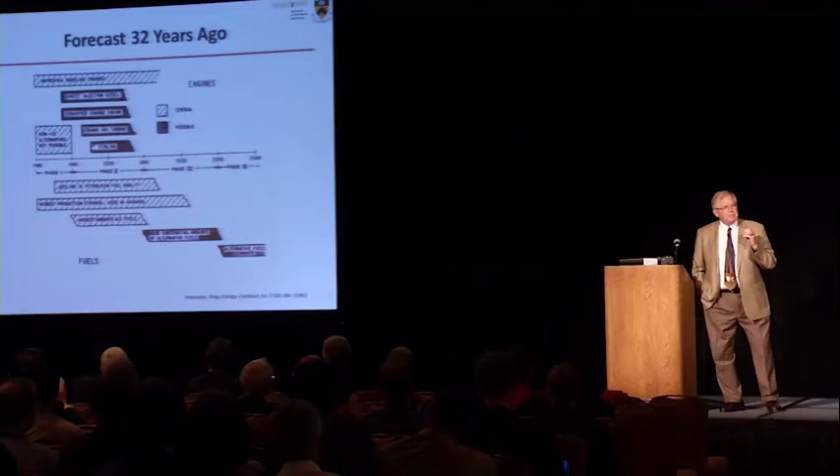Let me start today by showing you something John Heywood put together in 1981 about the energy field, engines and fuels, which is what I want to speak about today. I'm not going to talk as much about kinetics as many in this audience would think I would. I want to talk about real fuels and their interface with engines -- all types of engines and all types of fuels.

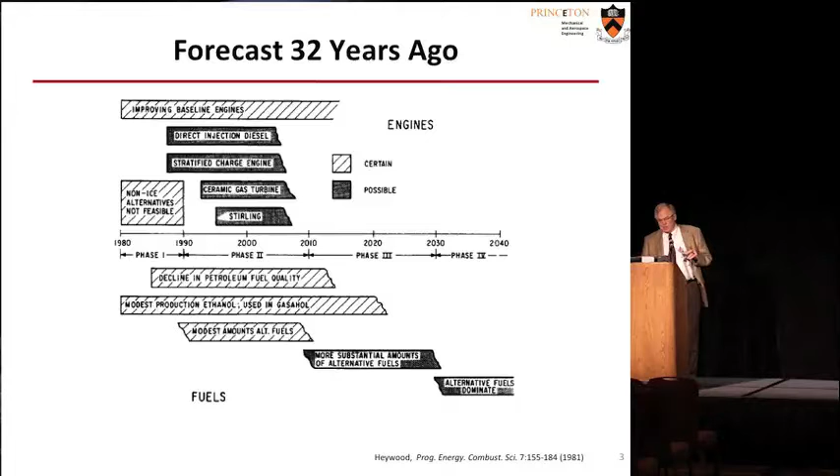I think John was quite insightful 32 years ago to build this slide. You'll notice we should be well into alternative fuels by this time because petroleum should be disappearing by now. This isn't as good as it might seem, from the point of view that there are some things missing -- this is how much the evolution of engines has changed in 30 years. HCCI and RCCI engines were not really being discussed 30 years ago, and they're now extremely prominent for their possibilities of major changes in thermal efficiency in engines and major changes in the way we deal with pollutant emissions from engines.

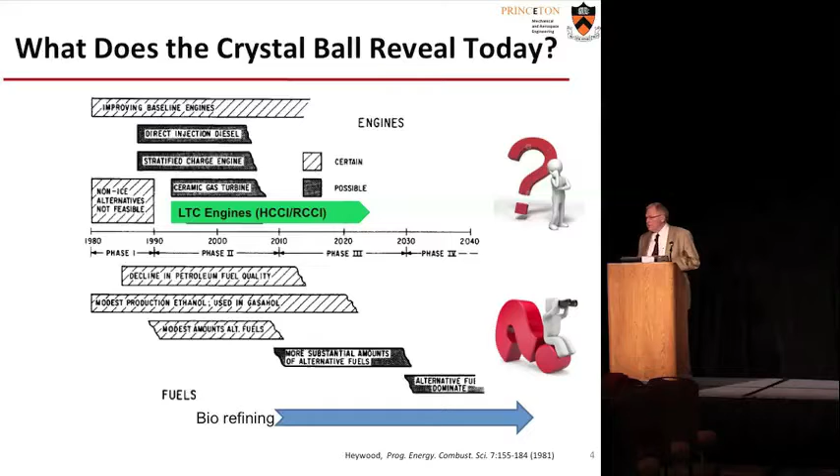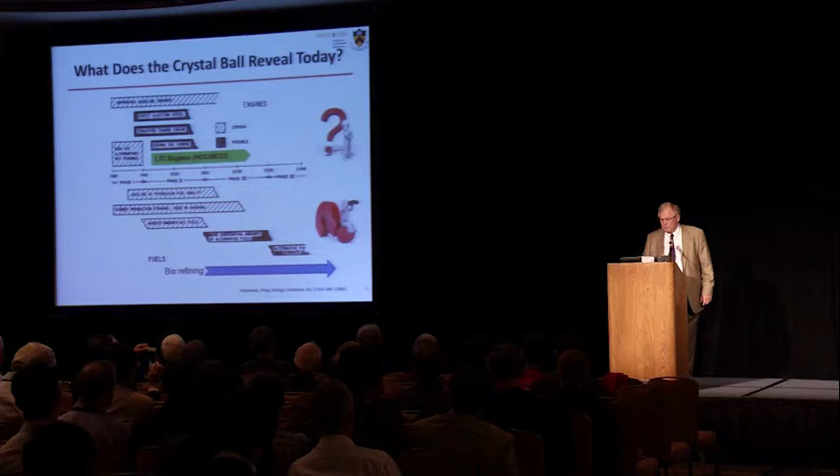The second aspect is biorefining. We've been learning much about how to make things in very efficient ways from plant life. We in this audience have been very interested in fuels, but the real profitable aspects are not fuels -- they're chemicals, biochemicals, and pharmaceuticals. On that list, fuels is not at the top. Making fuels economic is going to be a real challenge. So the question marks are real for our future -- whatever we say now probably is not going to be what really happens. We're going to evolve new science and new technologies. The drivers 32 years ago are the ones I've listed here at the top.

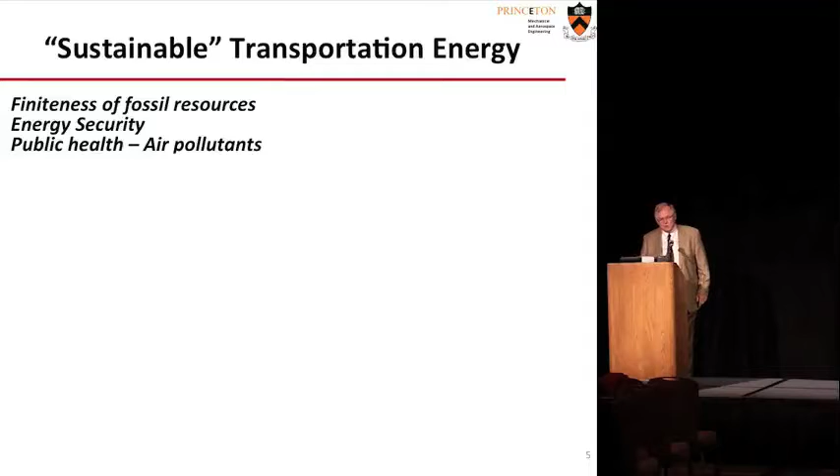I can remember very well in 1981 the issue about energy security. It was exactly the same here in the States, but there's something very new: carbon particulate emissions and climate change. We were talking about global cooling in 1976, not global warming. It was a very different time.

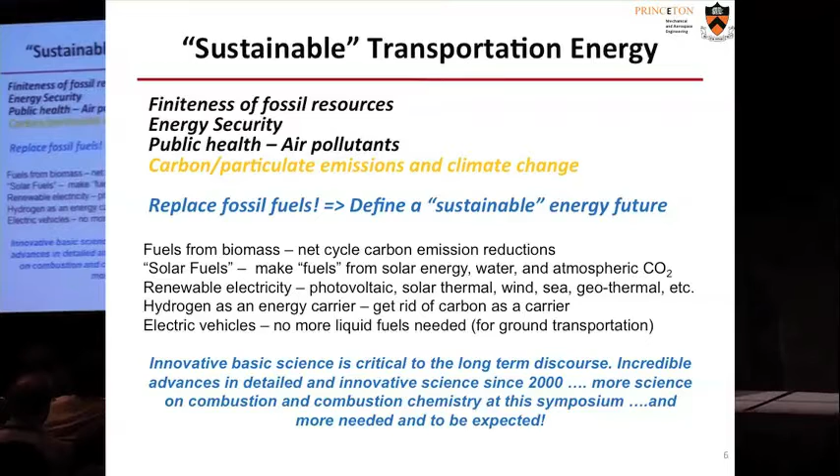Today the paradigm we hear is replace fossil fuels, get rid of fossil fuels, go to a sustainable future in energy, don't use carbon as a hydrogen and energy carrier. We'll make fuels from biomass. We'll make solar fuels from solar energy, water, and atmospheric CO2. We'll use renewable energy from wind, solar, sea, and geothermal, and replace having to burn fossil fuels. We'll use hydrogen as a carrier. We don't need carbon. We'll make electric vehicles.

There's been much innovative science here this week, very new. Our models are evolving, and our understandings in these areas are evolving at a pace probably not seen before because of the coupling of computations and experiments. Now I'm going to emphasize experiments today because I think experiments are the proof. Models are a way of interpreting experiments, and unfortunately models are still evolving. It's going to take some time, I think years, before we have all the details we really wish.

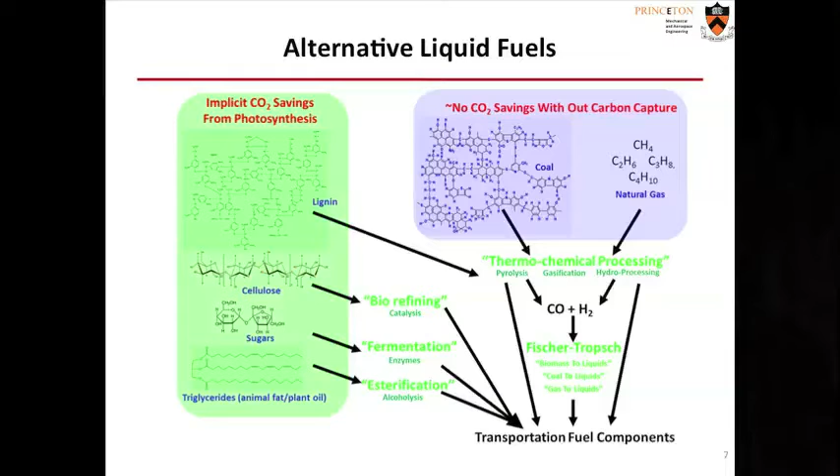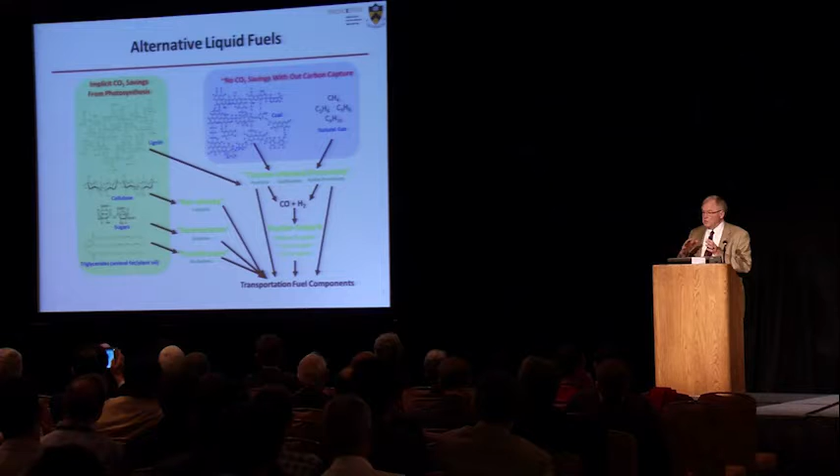And we have to do something in the interim. Those science advances are expected, especially for the alternative fuels field. This is only a very quick representation of what's emerged in less than 10 years through different methodologies of producing various fuels, mainly either thermal processing or bioprocessing, and not so much by actually combining them to optimize these processes. But we need to think about how to integrate those things.

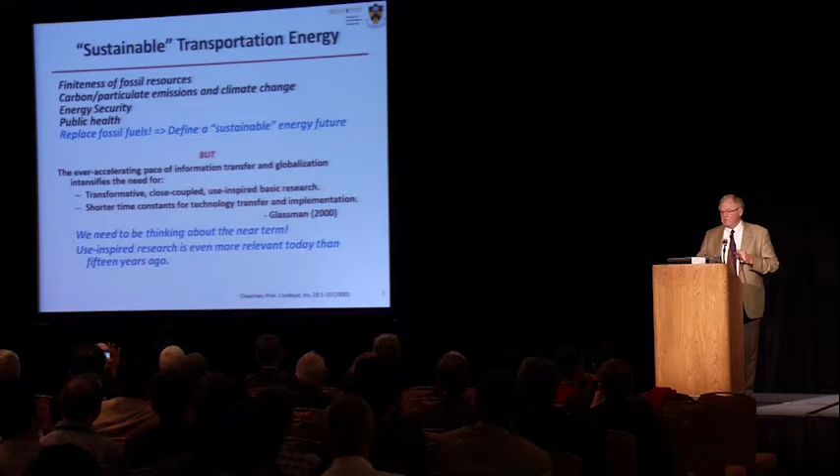I want to remind you all of a message my mentor delivered in 2000, which was transformative: close-coupled, use-inspired basic research is even more important as technology transfer and communication issues evolve. It's more important today than it was 15 years ago, in my opinion. But we have to look at today's stage.

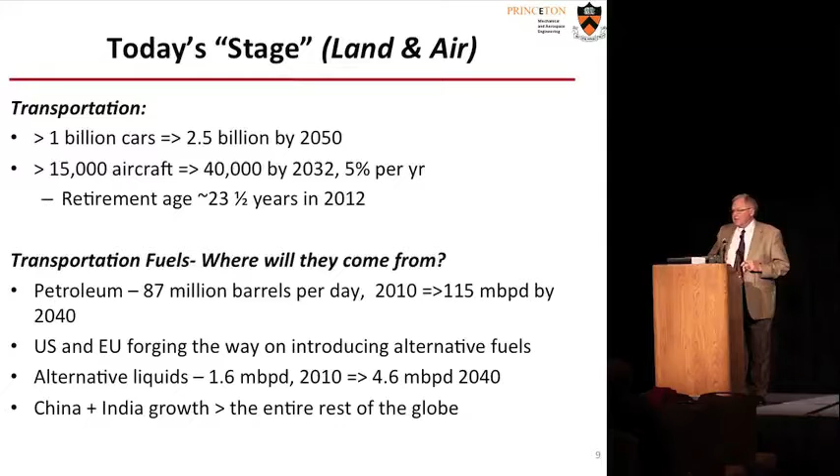Kalghatgi reminded us yesterday that there's going to be 2.5 billion vehicles on the road by 2050. There are 15,000 aircraft in the air today globally, expected to reach 40,000 by 2032. The retirement age of aircraft today is 23.5 years, and it's been between 25 and 27 years for the last three decades. Think about trying to replace that inertia in vehicles with new technology, with controlled emissions.

When we send our cars here that have some control elsewhere in the world, they remain in the pool for another 30 years. Our pool will change, their pool will not.

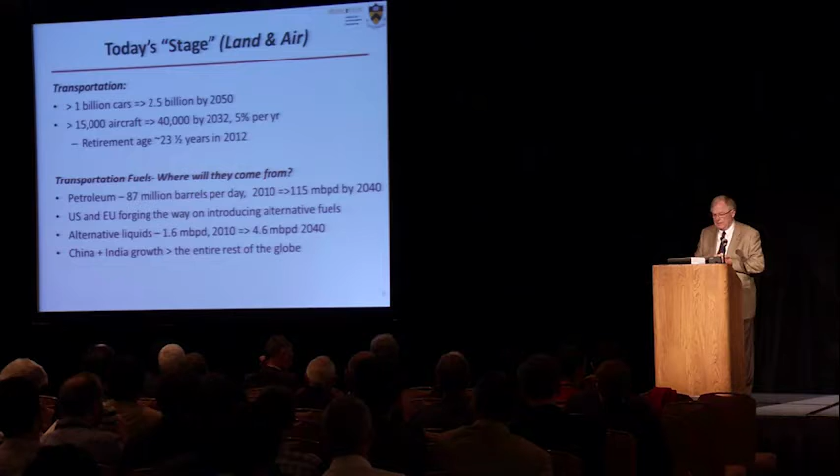Petroleum is at 87 million barrels a day today, going to 115 million barrels a day by 2040. The US and EU are both forging ahead with very aggressive programs for alternative fuels. The rest of the world, I doubt seriously. My opinion is they can't keep up with us if we do this.

And it's reminiscent of the issue I mentioned next, which is the alternative liquids issue: in 2040 that's only supposed to be perhaps maybe 4.6 million barrels a day, and a very large share of that not coming from biomass, but from coal, shale, and other fossil petroleum resources. China and India's growth in energy is going to outpace the rest of the entire world over this period.

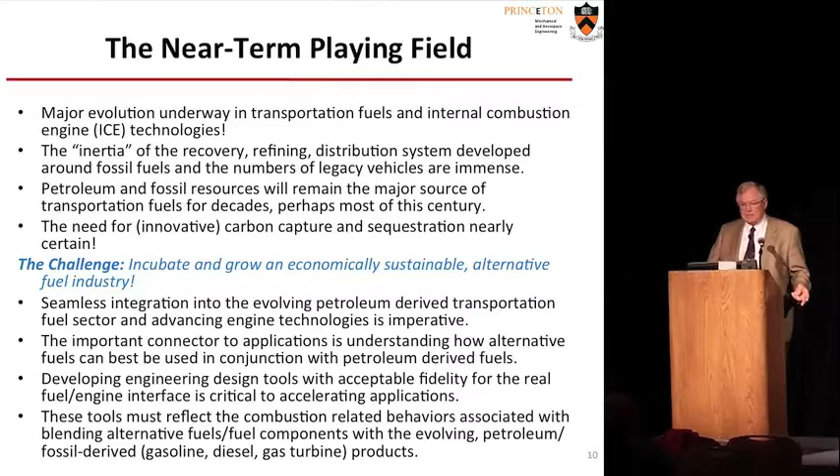You cannot ask people to make the transfer to non-fossil fuels when people's living standards and their ability to eat are affected. This is no different than it's been for the last century.

So major evolutions are going to be required, but we have to be careful about the inertia of the energy system and the transportation system. We need to integrate these changes now, or we cannot build these things in an economic manner that they will be self-sustaining. We can't start an industry of alternative fuels that's going to affect 2100 if we don't integrate it now.

And that means those fuels are not going to be things we burn in pure state. In my opinion, pure-state discussions about oxygenated fuels are very important to science, but they're not going to solve the application side, because all of those are going to require that we blend those materials with petroleum-derived materials if we're going to incubate this new industry well. So that seamless integration is important.

The seamless integration doesn't just extend to the use side, but to the processing and distribution side as well. Do you think we can add new pumps at every station for new fuels, or change our distribution system immensely? We need to consider how to do this in as seamless a way as possible.

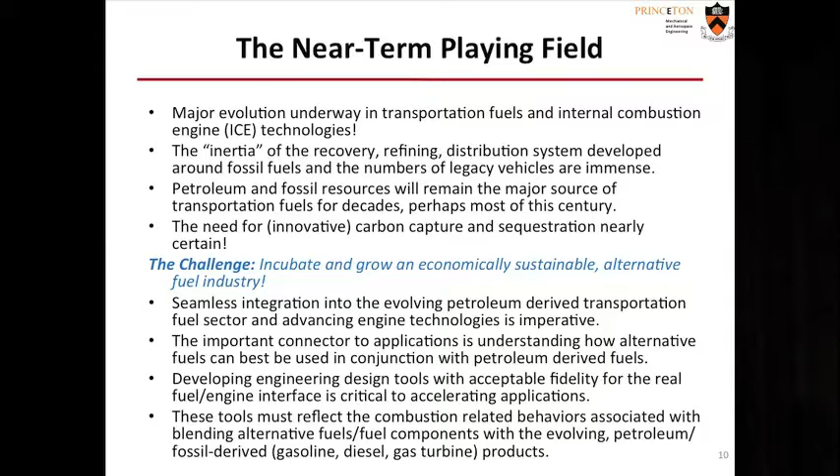The important issue here too is that we need engineering tools to do this. They can't be DNS, they can't be something that takes 100 or 200 hours on computers. I need to do something parametrically. I need to change a parameter. I need to see what the optimization of those issues are. That means I must simplify each one of the submodels involved in those engineering design tools.

I have yet to see someone tell me which ones I can achieve the least accuracy in and still have good engineering tools, and each one is going to be different. Many of us in this audience are interested in chemistry, and I'll remind us all at the end: how accurate do we need to be for engineering tools? I'm not sure. It's a question.

So let me say first, these tools, we want to know how to represent real fuels and the addition of other compounds to it.

I wanted to show you a real fuel. This is a GC by GC analysis of a real diesel fuel, recently published. Each one of those little circles is an indication of the component mass in that exposure. You'll notice the carbon number scale up at the top and the type of fuel on the right. We want to be able to represent that in engineering design tools. You can see how complicated this is—not only in terms of the amounts, but the distributions. There's thousands of compounds here, and we need to represent those in engineering tools.

So how do we do this? Well, this is the commercial way of doing it as far as the industry is concerned, and it's going to stay. Why is that? Because when we make fuels, we have to have a way of classifying them and standardizing them so that they are fit for purpose in the particular design system that we wish to use them. To do that, how are we going to specify that?

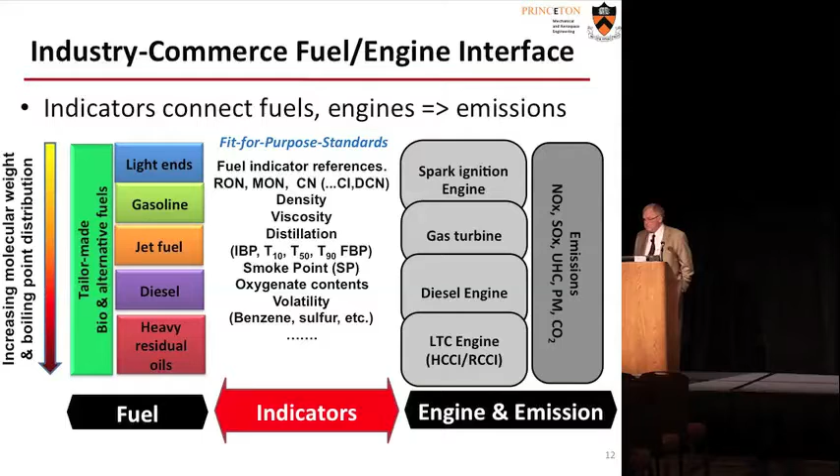When we really need to do that, we specify it through what are called indicators—fuel indicator references is what I've termed them. Research octane number, motor octane number, cetane, several types of cetane, cetane index, derived cetane number. Are they all the same? No, they're not. Cetane index is something that you and me should not be using because it doesn't apply to alternative fuels. It doesn't apply. It's built on correlations from petroleum.

Distillation curve, viscosity, density, initial boiling point, T10, T50, T90—those are recovery temperatures for distillation. I've recovered 50% of the mass at T50. Smoke point—odd test, right? Odd test. A wick test for smoke point. A height of a diffusion flame that soots. It's a standard for gas turbine fuels.

Oxygenate contents—we never define what the species distribution is in these fuels. We only define limits in reality. And that's the connector between the left side and the right side.

And I purposefully added another engine class here called LTC, low temperature combustion. I'm going to talk specifically about HCCI and RCCI. Now, yesterday, how many of you feel comfortable about engines? How many of you feel you know how a MON and RON is interpreted? I'm going to go very quickly here because I don't have a lot of time for this, but I want to make sure we're all on the same page on these issues. It's my instructional heritage from teaching.

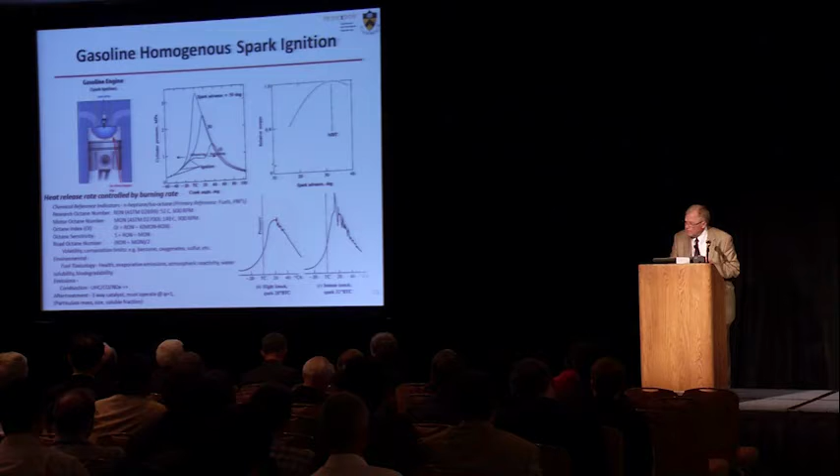And how these things just don't seem to work for some other applications because of the differences in RPM and other issues. And I want to talk some more about that. Diesels.

Multi-phase combustion. Here I was pre-mixed because I put fuel in the chamber very early during the compression stroke, perhaps with port injection. Here I'm injecting directly into the engine, and I now have a diffusion flame, and the heat release is not controlled by the burning rate progress across the chamber as it was in HCCI or in spark ignition. It's controlled by the mixing rate in the system.

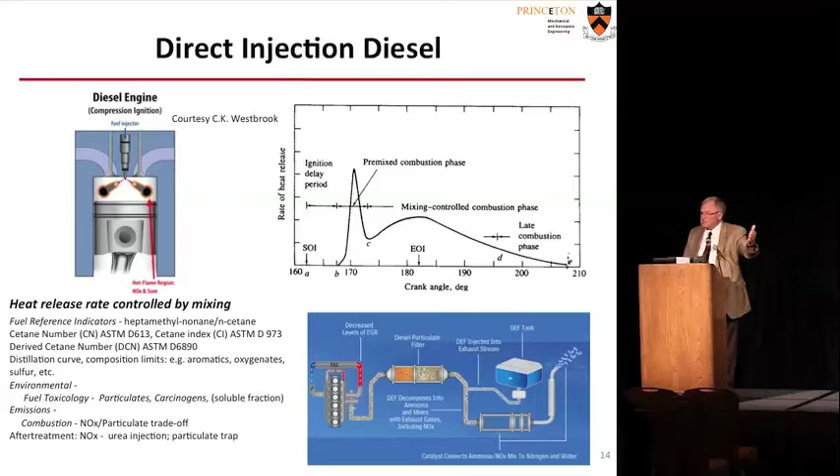It's controlled by the mixing rate, and I have two stages to it. When I start injection at SOI, right here, this is top dead center for the piston, I have some time for things to mix, so I have a pre-mixed burn of stratified material when it first ignites, followed by a mixing limited one. These can vary depending on the design, and we have some very modern injectors today that can pulse several times to change that whole profile.

But here's the complication. Diffusion flame, very hot, NOx. Not hot enough, particulates, because they didn't burn out - it's a NOx particulate trade-off. I've got to have all of this after-treatment to control emissions. It's as expensive as the engine. If I can get rid of it, it's extremely important.

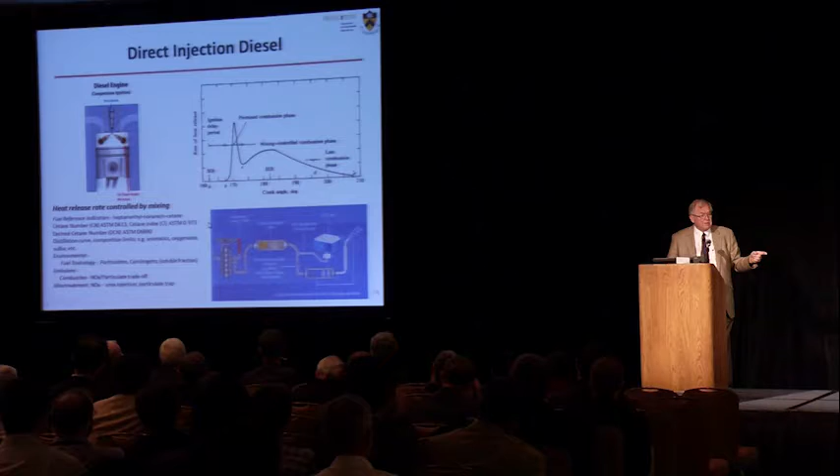Homogeneous charge compression ignition, LTC, a very specific kind. I'm going to homogeneously charge the engine with a mixture. There's no flame propagation in this engine. The burning rate is controlled completely by the chemical kinetics.

This is the theory. The reality is it's not. If I stratify the charge, I get some other behaviors that are important. But I want to show you some things that are very important to the issue of OI, MON, and RON. When I look at this engine under a condition where it's controlled auto-ignition for a homogeneous charge, I see what you see over here on the right as a function of crank angle.

Crank angle here, if I can read it against the light, is specified where 0 is top dead center. What they've done in this experiment is adjust systems such that this peak heat release is in the right place to get performance. They do that by finding the right crank angle, CA50, where 50% of the heat release has occurred. That's a control parameter for these kinds of engines.

And I want to show you what happens. I've got some low temperature heat release out here, and I've got the major heat release here. These are for primary reference fuel mixtures. Remember...

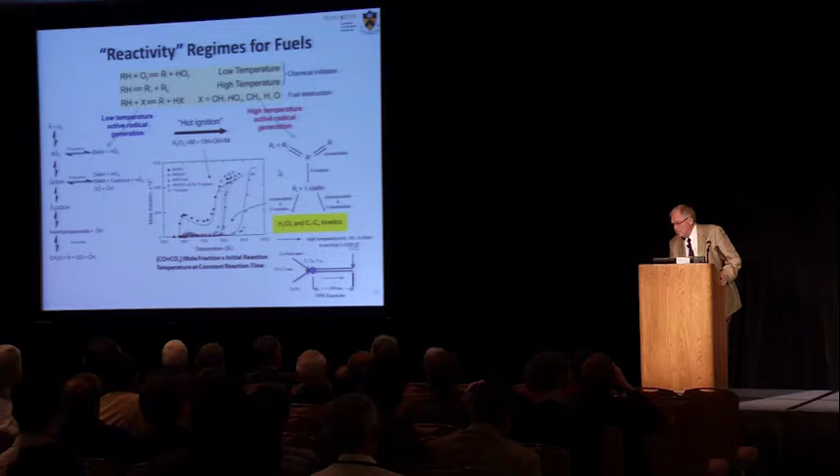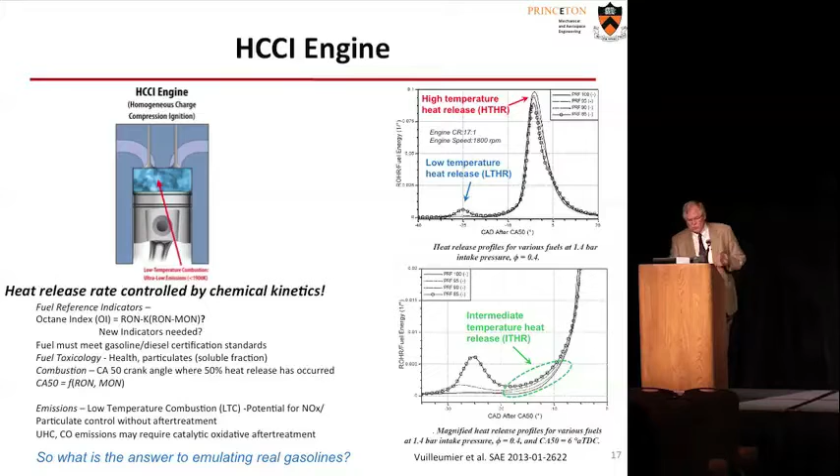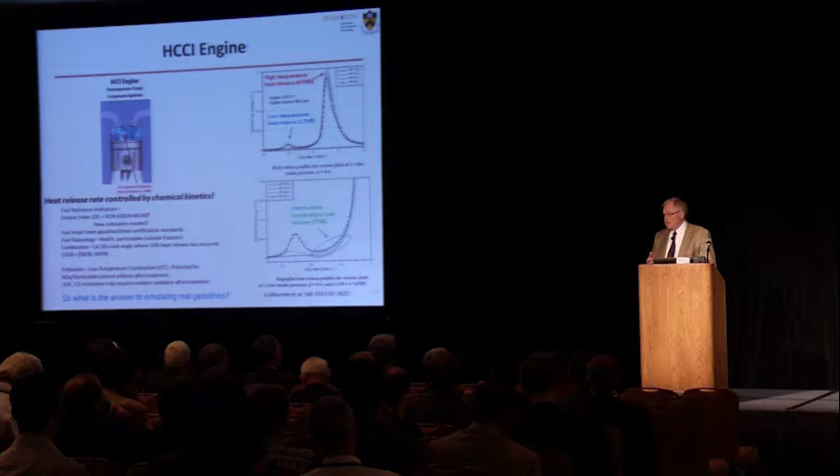So what is the answer to emulating real gasolines? What several have found is that if I try to emulate a real gasoline by using a PRF mixture that matches the MON and RON, it doesn't work. Why doesn't it work? It doesn't work because those aren't the only parameters that are important to emulating real gasoline.

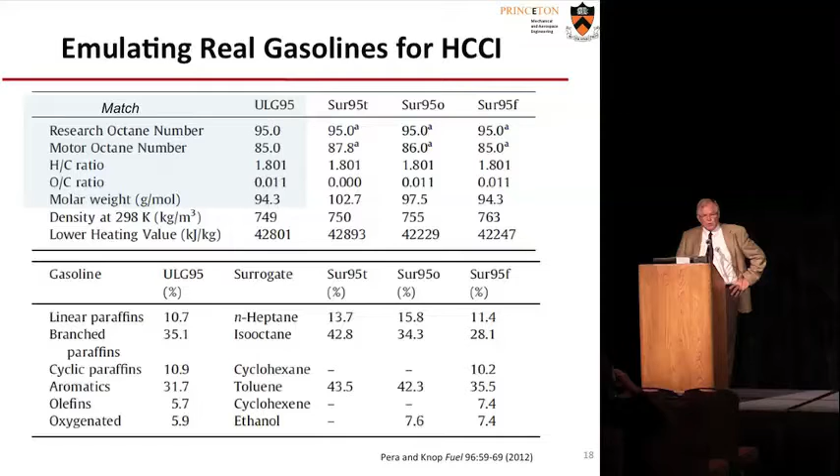This paper by Pera and Knop demonstrates something that we started working on in 2000, and you'll find the early publications around 2003, 2004 about matching what we call property targets for gasoline. They chose the following property targets: RON, MON, HC ratio, and if it had an oxygenate in it, OC ratio. They said, I've got to match those things. You can't do that with PRF.

The HC ratio for PRF near 90 is 2.25, and the gasoline is 1.8. That means the energy density of those materials are entirely different. That means that at an air-fuel interface, I don't have the right volumetric stoichiometry with air for phi equals 1, which is the way I need to operate an engine to control with three-way catalysts.

So let's try to match those, and we'll do it by adding toluene to N-heptane and isooctane, which is what they did. Here's the gasoline that's used for standards in Europe, and here is a match of that gasoline in terms of RON, MON, HC ratio—I left out the oxygenate, I'm not going to put an oxygenate in it. And here is the density and the lower heating value that were obtained by doing that.

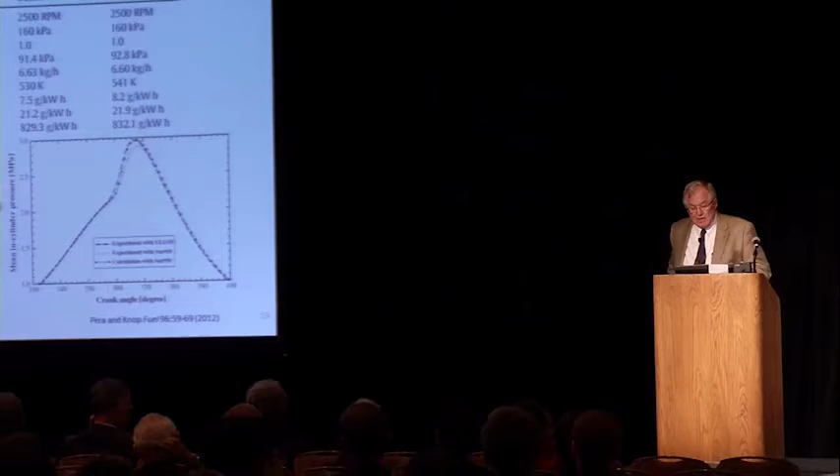And when I did that, I got exactly the performance of the real gasoline in a compression auto-ignition engine. And not only did I get that, I got the same emissions.

So we can match gasolines, but we can't match gasolines with just OI. There are more combustion property targets that are needed to match and study real gasolines. And you cannot study real gasolines in real engines using PRFs. How many of us have been using PRFs all of this time to try to understand real gasoline? You can't do that. And you certainly can't do it in HCCI because I can't match the LTHR, the ITHR, and the HTHR. I said some of my statements are provocative, and I meant it.

And I hope we have a discourse about these things. I think it's very important.

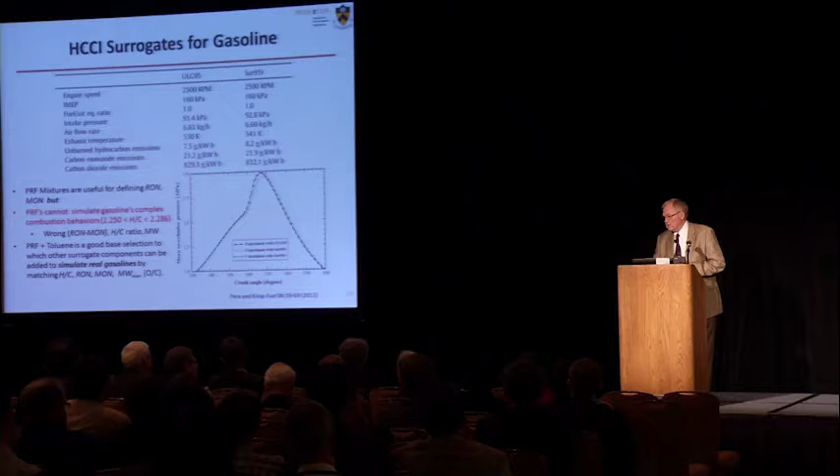So is this idea really something I can pursue elsewhere? Suppose I try and I inject two fuels now, one that has a high octane, one that has a low octane, and I do this in real time so I can vary the octane character in the engine. Reactivity controlled compression ignition. Two fuels on board.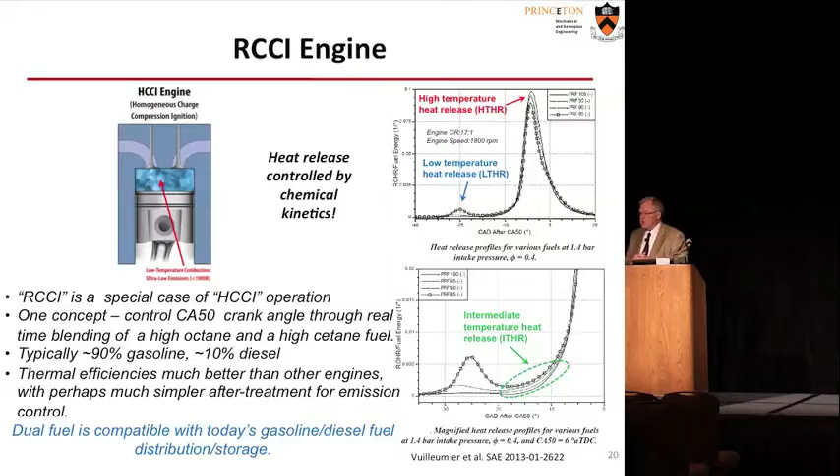Oh my goodness, two fuels on board—2 tanks in every diesel on the market today to control NOx. Did you know that? Urea is injected after the engine. That's a second tank to control NOx in vehicles. So 2-tank technology is there.

How about injectors? Injectors are there, PZTs. Controlled, very multiple pulse. I can stratify the charge in this HCCI by direct injection and by aspiration of one fuel and injection of another. I can do it several ways. And this is what Dr. Reitz has been studying and Sandia has been studying.

The thermal efficiencies of these engines have been demonstrated in the laboratory to be higher than 60%. That's 35% better than the best diesel. And they have very little after treatment. I don't need to treat for NOx. I don't need to treat for particulates because the temperatures are so low in these engines.

And the increase in thermal efficiency isn't magic. It's that the heat losses to the walls in that engine are so much lower because the combustion temperatures are so much lower. So this is the future for combustion.

It's completely compatible with today's fuel system. I can drive up to a pump and fill it up partly with gasoline, partly with diesel fuel. I can modify diesel and gasoline to meet the advanced diesel engine design and the advanced spark ignition engine design. And I don't care what their octane numbers are because I'm going to build a smart engine.

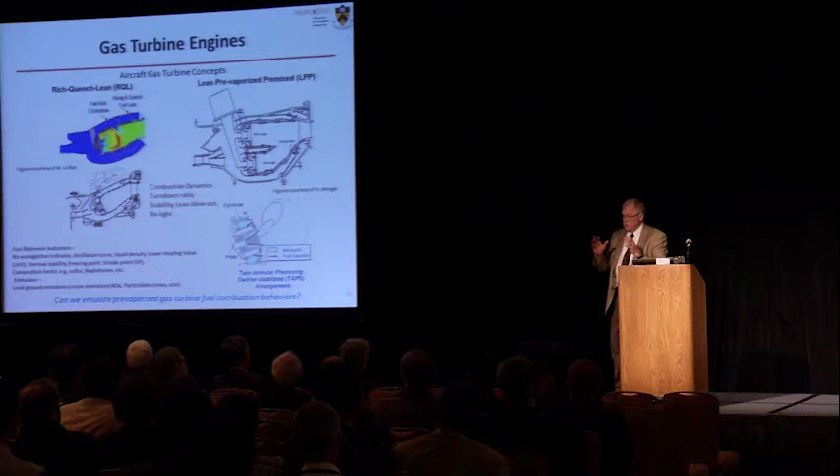So I'm going to add smoke point to this system, but I wanted to show you there are two very different concepts going forth in gas turbines, and it has to do a lot with how I atomize and how I distribute in the beginning. This is not as well characterized right now as diesel injection, and it's a hard part of initialization for modeling gas turbines. Here I'm going to have a rich region, try to keep it rich to keep the temperature down, then I'm going to quench, put things together and go to a lean premix system over here, and you can see they're very different.

So let's talk a little bit about these property targets. DCN - there is no auto-ignition property for gas turbines, so I'm going to make one up. I'm going to use the diesel one. It's not an auto-ignition property, it's a reactivity property - I'm just going to substitute it. It's only a correlative property. I'm not going to use it as a diesel.

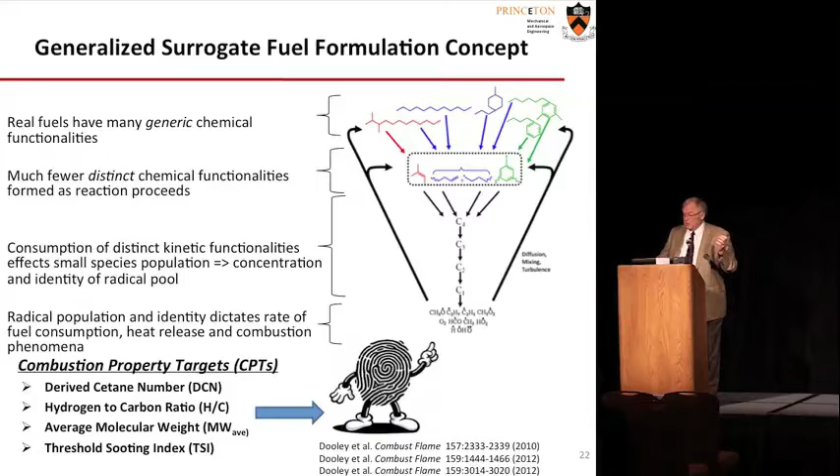I'm going to look at H/C, I'm going to look at molecular weight, which was very important in the last case, and I'm going to add TSI, which is a representation of the smoke point divided by the molecular weight. And I want to emphasize something here - I'm not interested in the real fuels that we started with. I'm interested in the distinct chemical functionalities that they produce.

What are those? If it's an N-alkane, I produce lots of olefinic fragments that are straight chain. If it's an isoalkane, what do I produce? Isoalkanyl groups, C3s, C4s - they have a very different history in terms of their reaction than the straight chain olefins. Aromatics, what's the biggest thing I could possibly see? Benzyl groups - different distinct functionalities. Are there more of them? I believe so. Do we have them all identified? No, this is a work in progress. But they control this region here of C4s to C1s, which generate the pool that attacks the real fuel, and it's this entire cycle that defines the burning rate.

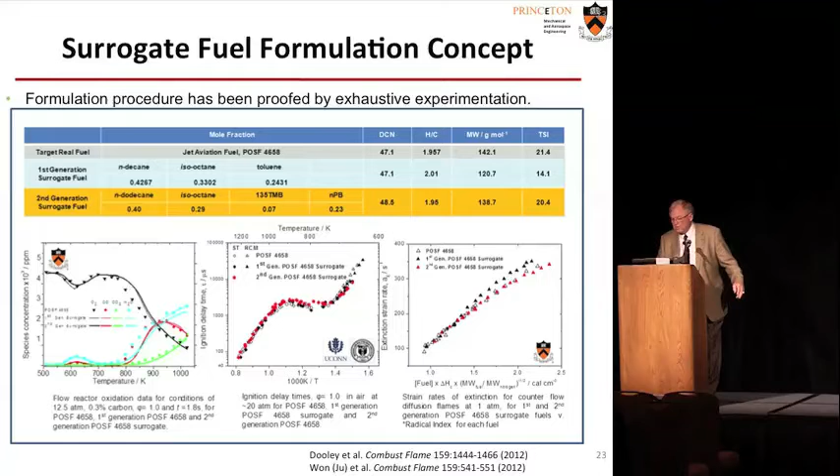Does it work? Here's a comparison of simple surrogates of N-decane, isooctane, and toluene, or N-dodecane, isooctane and two other aromatics. All I did was match the property targets I mentioned with each of those - a first generation, which were only the ternary components, and a second generation. What's different about them? The second generation can actually match the molecular weight. The first generation couldn't. If I look down at the bottom, you can see the reactivity type profiles I showed you for the flow reactor are reproduced for the real Jet A fuel and the surrogate mixtures nearly identically. Not quite in this region, and I'll talk about that. But at the low temperature region, they're identical. At the high temperature region, they're identical.

And here's the proof of that in terms of ignition delays of the real fuel and the two surrogates. The data spread here is as tight as one will ever see in systems. There's rapid compression machine data here, both generated by parts of the MURI team that did this work. And finally, on the right, we looked at strained extinction in diffusion flames, and there we see the molecular weight is a very important issue. We can talk about that later if you wish.

Speciation - I want to mention Ken Brezinsky. This is his work in pulse shock tubes. What he's done is look at the way this speciates as a function of reaction temperature at about the same residence times. You can see that the real fuel and the second generation fuel, totally different in their real species distributions, look identical except for a couple of things, and I'm going to show you what those are. In C2s, they look identical - 4 components and 1,000.

They don't look identical in butenes. Why not? Because we know isooctane produces T-butyl radicals, and we're using that as the isomer here. But it didn't matter at the C2 level.

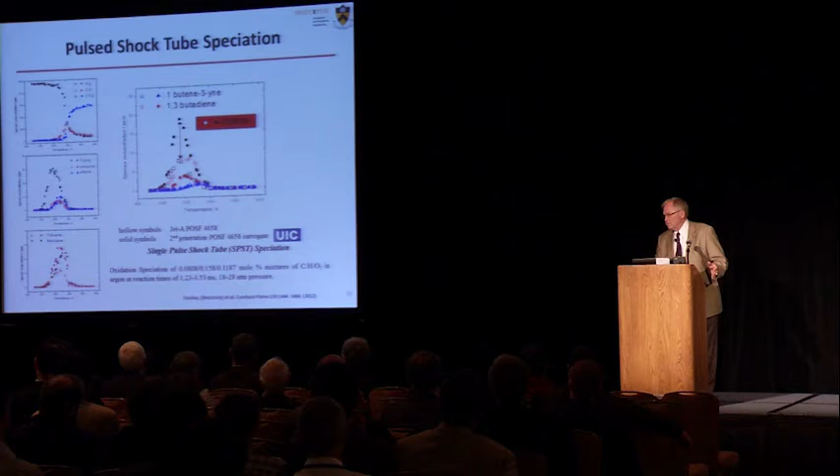So emissions can be done this way, and you have to be careful how detailed you wish to know something. That's the same thing that's true with anyone's detailed model. What does this all come from? Simple functional group analysis of this problem.

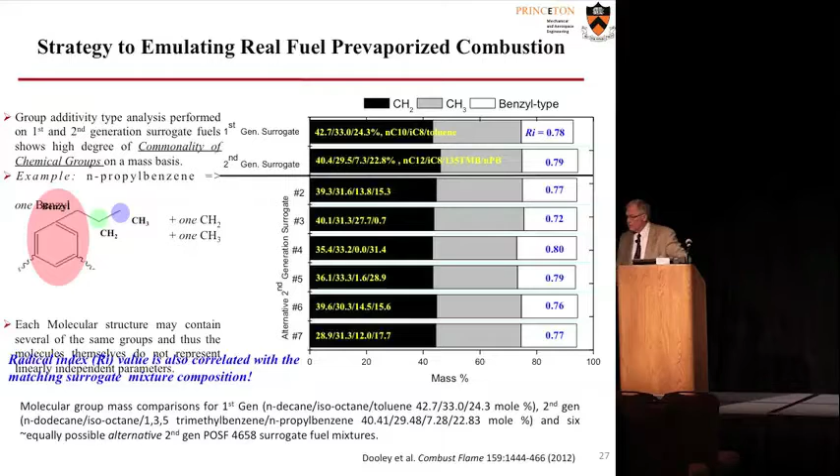We chose to represent CH2, CH3, and benzyl groups as a first cut for functional groups. We made up our first generation and second generation mixtures that look exactly like that fuel, and we made up 6 more C2 second generation mixtures. You can see 6 of them down here at the bottom. They're all different in composition but have the same combustion property targets. Look at the distribution of CH2, CH3, and benzyl groups—it's telling us that functional group or carbon-carbon bonding structure in these molecules is a controlling factor.

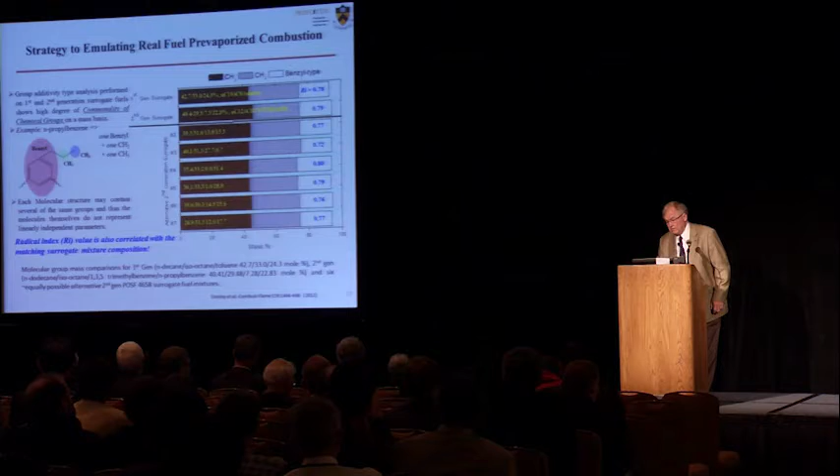I want to show you some new data. This hasn't been published yet, but it's about to be. It's reactivity profiles for C7 through C16 n-alkanes. As we go to larger and larger alkanes, from C7 to C16, you see more activity in the low temperature region. And look at what the hot ignition, where peroxide decomposition controls, did—it stayed exactly in the same place.

Over here, you can see the CO mole fraction also shows that same behavior. There's a blow-up here that I hope you can see—I can't see it very well up here. But I want to put you on this figure. This is the formaldehyde formed in those systems. Look how good formaldehyde is as a marker of where LTHR and ITHR are. This has been thought about in the literature, but this is the best experimental evidence for it I have seen.

I want to point to the right figure over here. This is a correlation of the cetane number of those fuels with the temperature rise, which is only about 9 degrees over all of those reactivity profiles. And you can see it's entirely linear—oh, I can't even measure 9 degrees accurately.

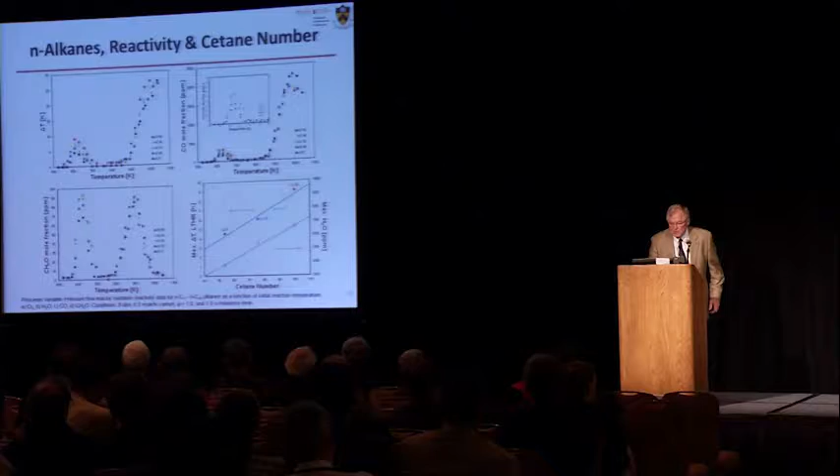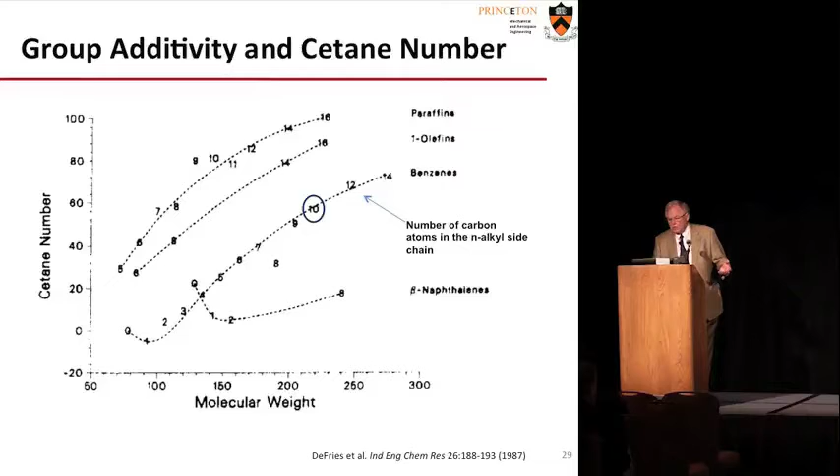So, wow—this was published in 1987 by DeFries and Indritz. You can see here a correlation of cetane number with the normal chain length for paraffins and the normal side chain length for alkyl benzenes. These are very well correlated with functional structure. He was one of the first groups to introduce nuclear magnetic resonance to define functional structures and carbon-carbon bonding, and correlate just about every kind of physical parameter you can think of with chemical structure.

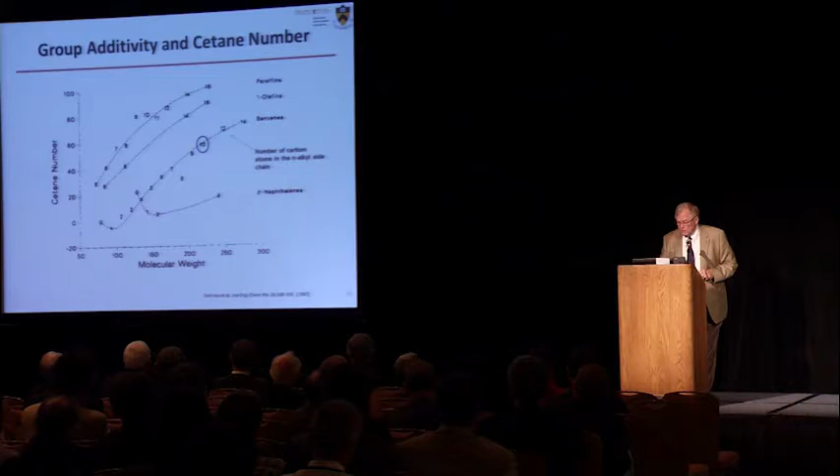So I want to show you something about ignition delays. These are computations. What I wanted to do was take methane, hydrogen, C7, C16 n-alkanes, and a C16 isoalkane and compare the ignition delays.

Where did fuel disappear in each of those? Turns out in hydrogen and methane, there's 95% of the fuel or more left when ignition occurs in this plot. How much fuel is left when ignition occurs with the hydrocarbons? None. It's all been converted to fragments at that point. And that maximum heat release that we use to measure ignition delays here is carbon monoxide burning that has been suppressed by all of the fragments of hydrocarbons, because CO plus OH can't compete with it.

Is this new knowledge? Irv Glassman published this in 1978 in terms of experiments on hydrocarbons. So this isn't new knowledge, it's not something we discovered from models. It's something I'm trying to show you as important in models.

What does toluene look like here? Does it look like the n-alkanes, or does it look like hydrogen and methane? It looks like hydrogen and methane, because hydrogen, methane, and toluene ignition delays are controlled by getting the first radical in these systems. The others are controlled not by getting the first radical at all.

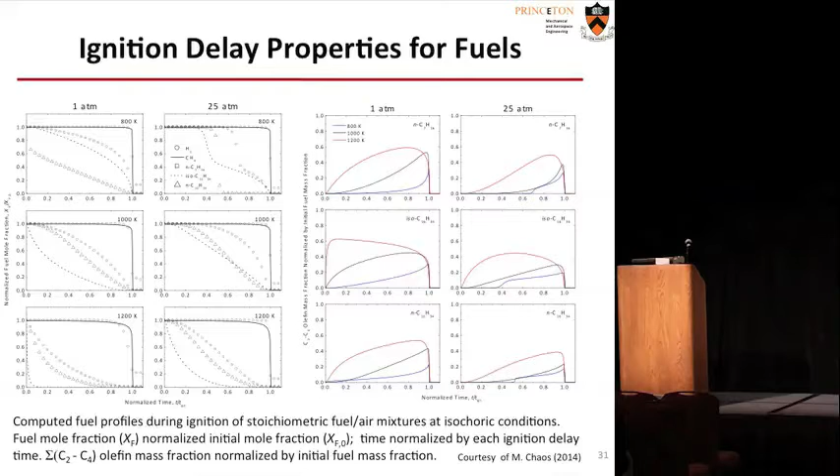So what happens to the olefinic structures in these systems? They're different with pressure and temperature for each one. And I haven't yet added an aromatic to these—if I do, they'll differ immensely, because the aromatic will burn late. It will compete for radicals with the n-alkanes and slow the n-alkane oxidation, but it will also itself not regenerate radicals, as do the fragments from the n-alkane.

Not only does the olefinic evolution change with the initial temperature and the fuel, but its distribution changes, from C2s to C4s. These are the things we want to couple with at the detailed chemistry level.

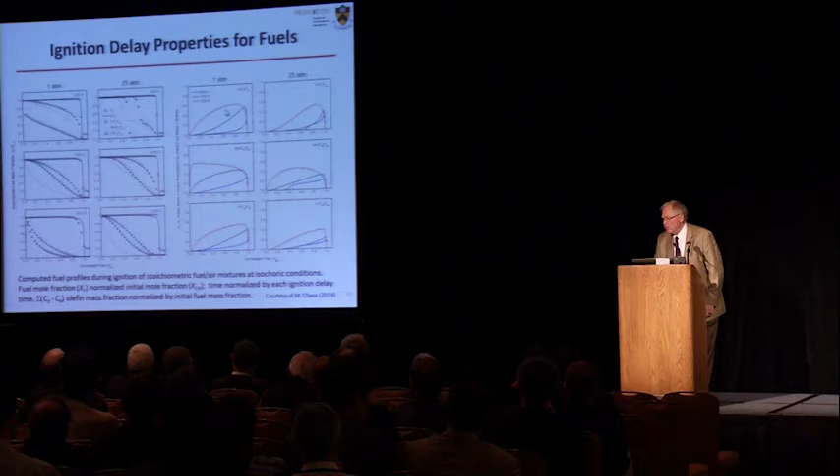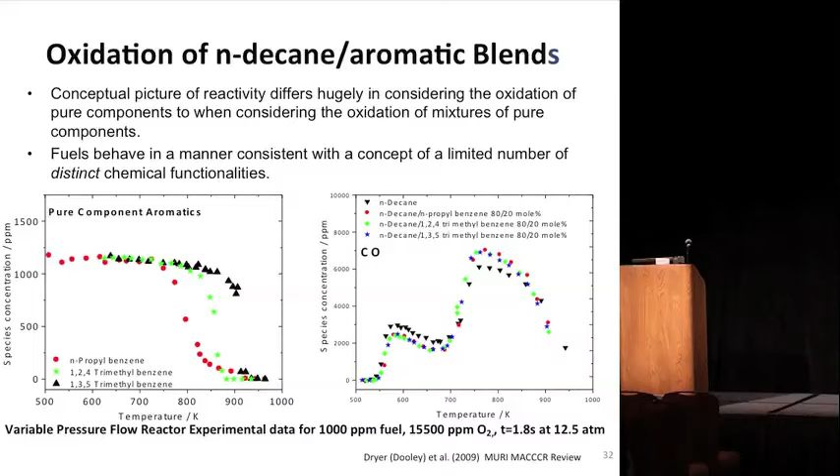Let me show you what happens when I add an alkane—I take an alkane and add aromaticity to it. I have three different aromatics here: 1,3,5-, 1,2,4-, and N-propylbenzene. On the left, you see their reactivity profiles as individual pure components—they're all different when they start to react. But on the right, when I add them to N-decane, they all affect the N-decane oxidation the same way. Why is that? They're competing for the N-alkyl radical.

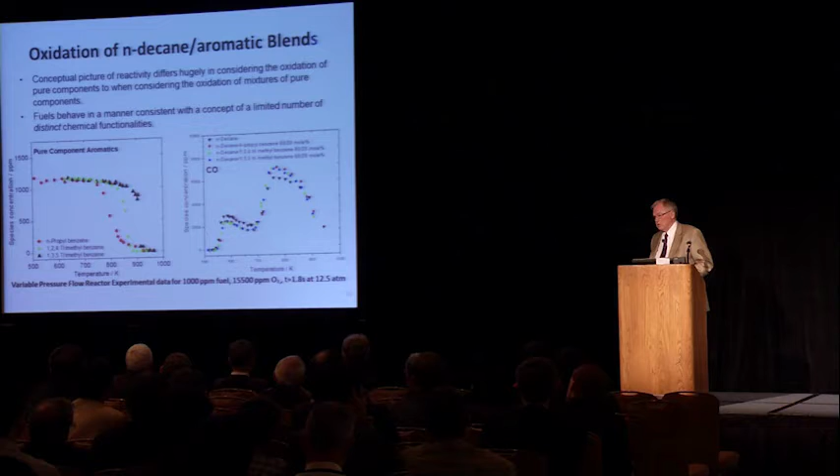They're competing for the radicals that are producing the N-alkyl groups—OH, HO2, CH3. They're competing very heavily for it, and that's their main effect in low temperature chemistry: competition, not regeneration of radicals.

Well, let's use a little bit what we know. In the 2007 papers on diesel surrogates, we recommended using N-decylbenzene as one of the components for diesel fuels. It has a very high boiling point, making it very difficult to run experiments.

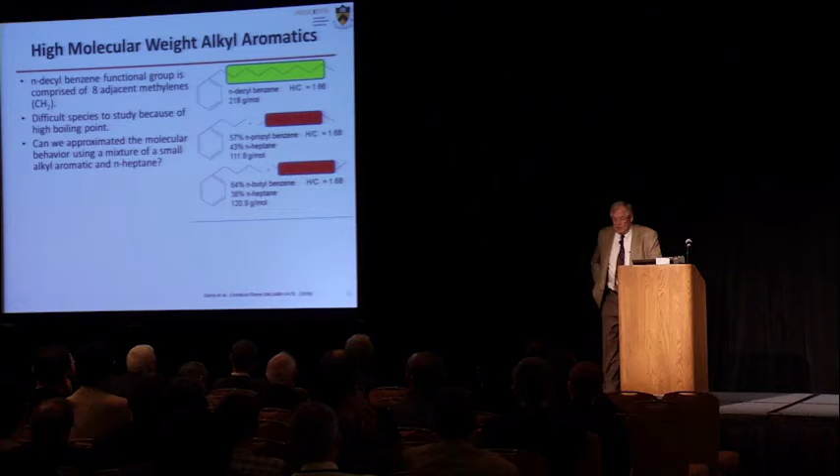So let's see if we can represent it by N-propylbenzene plus N-heptane, or N-butylbenzene and N-heptane. There's an entire paper representing this, but the DCNs don't look anything like the DCN for N-decylbenzene. I can go back and show you the value for that in the DeFries study for the carbon 10 chain length from an aromatic group.

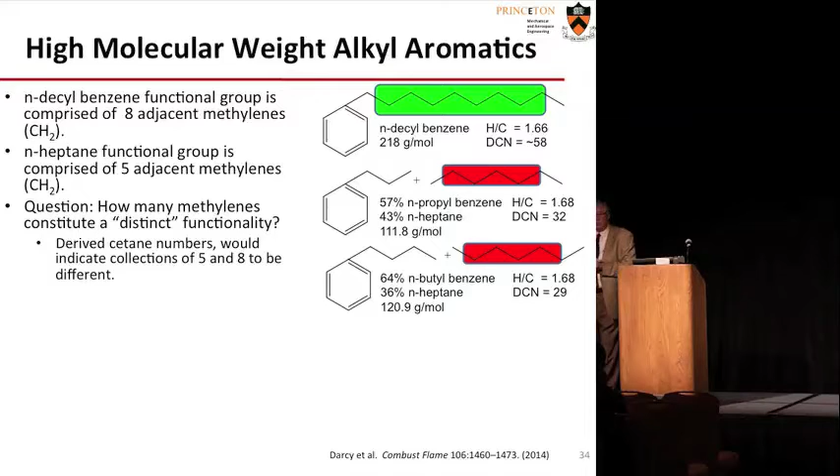You can't represent this without going to N-hexadecane with N-propylbenzene, and that's because the groupings of CH2, the adjacent CH2s in those molecules, represent another distinct functionality for high cetane numbers. So if I want to do things, I've got to know a lot more about the functional structure. You can see on the left that the ignition delay for this mixture computed is very different than either of these two, which match each other, by the way, because their DCNs are so close.

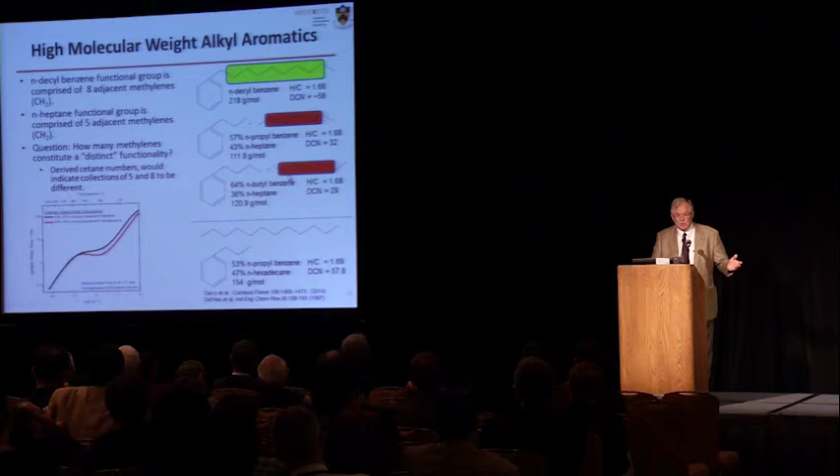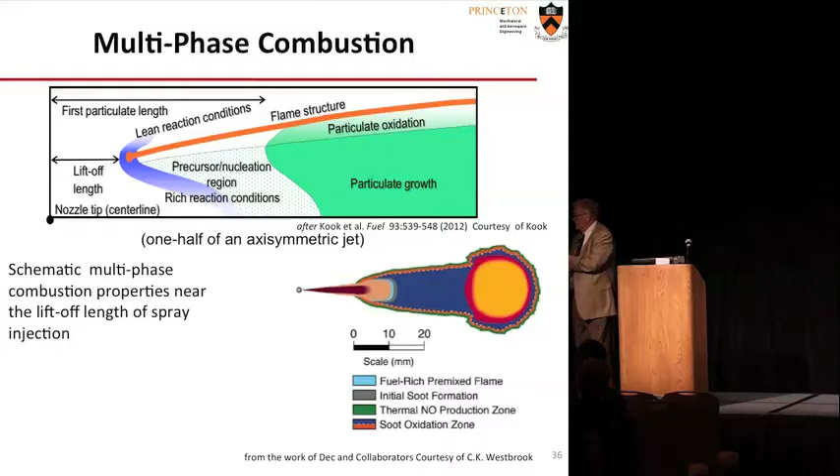Well, this is what we're really interested in. We don't care about homogeneous combustion—we want to model full multi-phase combustion. So now we've got to couple the liquid phase injection, its penetration, its atomization, its vaporization, its mixing with chemistry in our engineering tools. I've used schematics here from the work at Sandia. I think they're wonderful for showing how complicated this problem is and what we have to put into engineering design tools to learn how to add anything to petroleum.

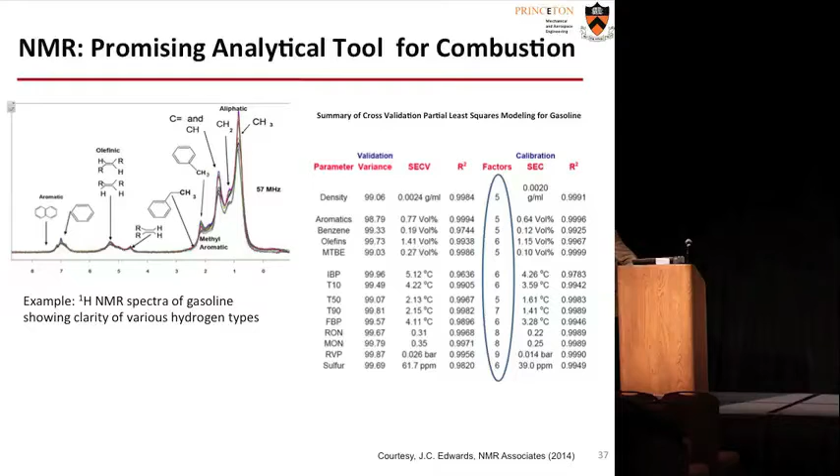So let me show you something else. Would you believe that I can blend up to 6 to 10 refinery streams, measure online NMR spectra of them, and control the resulting MON and RON to 0.32 units? That's done commonly today. I think our community doesn't know how powerful NMR is. What I'm showing you here on the right is what John Edwards has produced in terms of linear analysis of the spectra for NMR, and he can produce these characteristics from the NMR spectrum of a real fuel to ASTM standard levels.

I never did an ASTM standard test at all to characterize this gasoline. I notice I'm not only getting RON and MON, I'm getting physical properties—density, distillation curve, lower heating value. These are all chemical structural properties of the fuel. And if I have the right property-property relationships, I can predict them just the way I predict everything else that you and I are so used to using chemical thermodynamics and flame propagation in the subjects we study.

There are people trying to do QSPR fitting of laminar flame speeds for tailor-made fuels from biomass in Germany. So this is a very powerful tool put together with the two-dimensional GC type of analyses that I showed you earlier. We can characterize these fuels really well, and we don't want to reproduce their compositions.

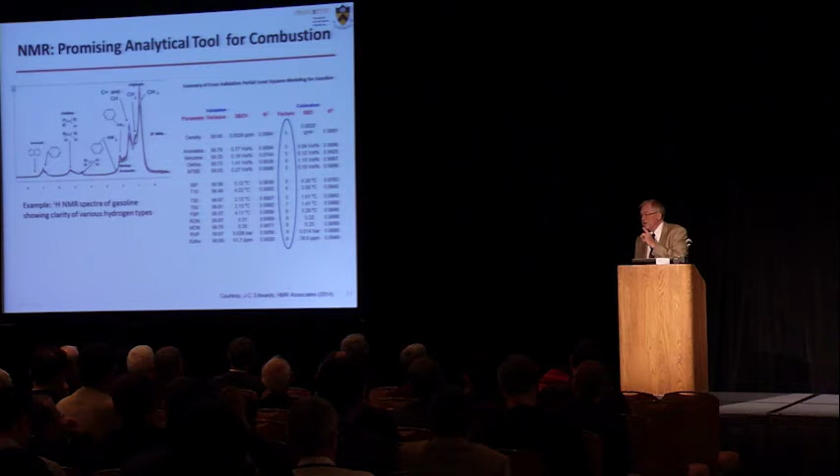We never have. The most prevalent way to do a surrogate for a real fuel is to choose one species for a class function of molecules. And what I've shown you so far is that the class function doesn't matter—what matters is the functional group representation.

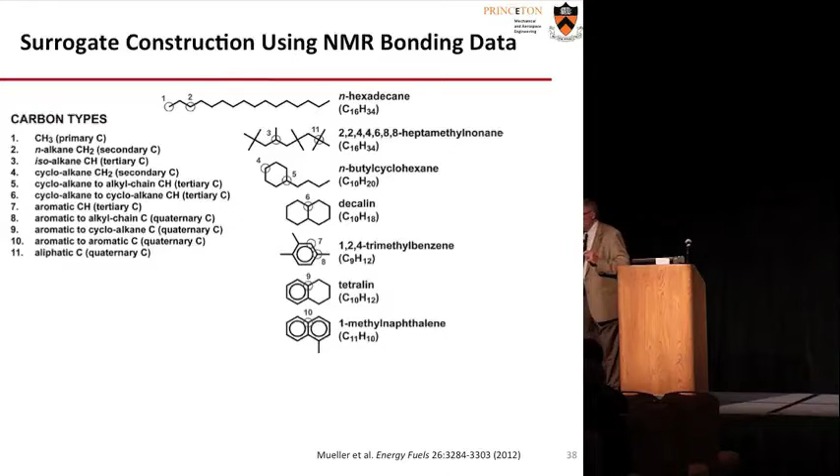How did they do that? I don't know—we play with these things right now. We don't have good theory. I don't have good theory yet. This is an applied science necessity for what I described earlier.

This is a very good example. If we can understand this, we can make up fuels, and they did—made up fuels that not only had the same chemical indicators of cetane number, but had the same physical properties within those errors. So I didn't have to separate physical properties and auto-ignition properties at all to get the fuel right, which is what we've tried to do with models. And I'm afraid the models just aren't precise enough yet to do that.

They're wonderful for interpreting the results, but they're not precise enough to understand whether this theory works or not. So let me show you that it doesn't work at the class function level. On the left are two of the diesel fuels that they tried to represent by this surrogate, and you'll see that the class functions of aromatics and alkanes don't match at all what was in the real fuel.

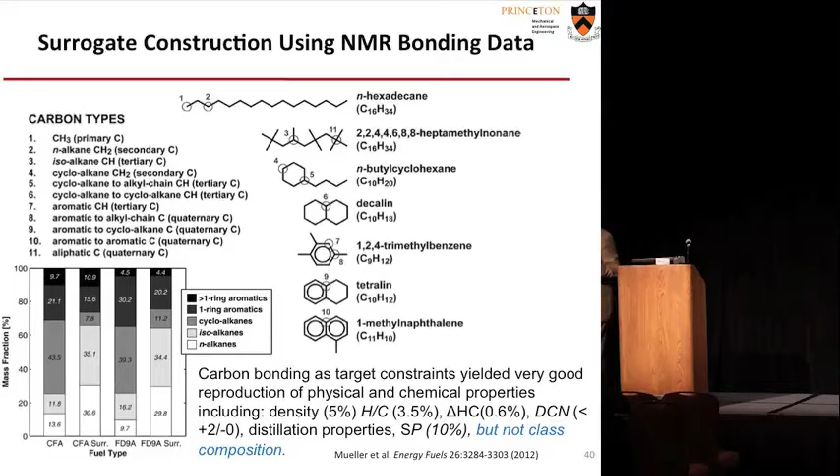It's that combination matched the appropriate functional group distribution. Functional groups may be a way of developing much simpler chemical kinetic representations of fuels. That's my message.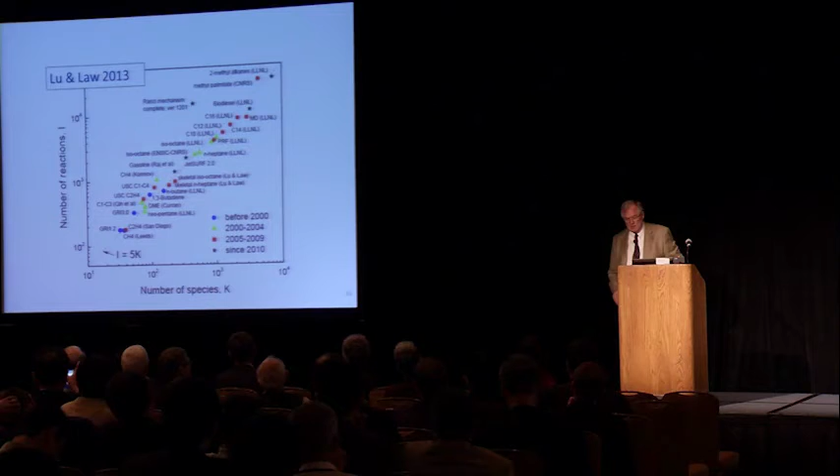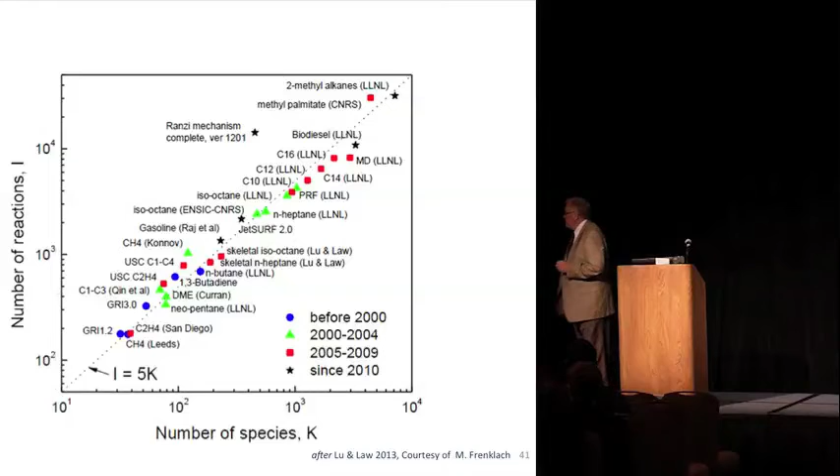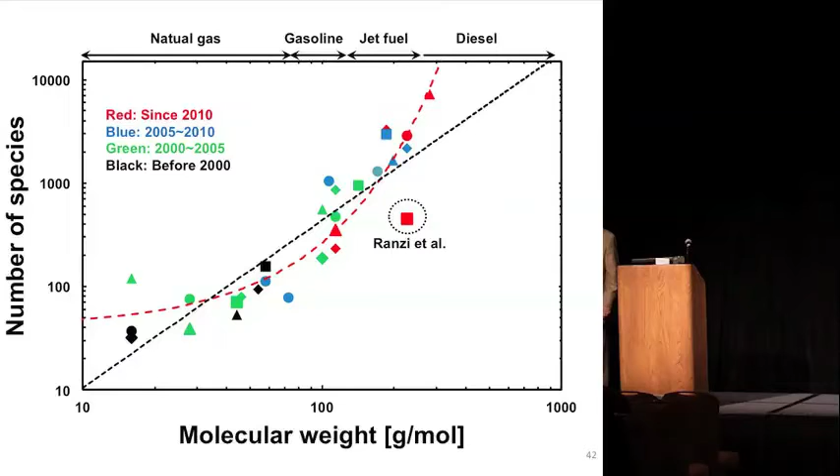So this is where we are now for developing mechanisms, and what's frightening to me is this looks linear on a log-log scale, but this is what we've generated since 2010. The numbers of reactions are growing faster, and we want to be down here for engineering design. We think we can get there by numerical reduction methods. My opinion is we can't. We can't get that small.

Numerical reduction methods are telling us something else. How much of the model is just not relevant to the engineering global combustion properties we're interested in? That's a horrible statement to say, I apologize, but it's true. It said they weren't relevant. Their accuracies were not relevant. Their uncertainties were not relevant.

Well, we eliminated them, but why did we put them there? Because we want to learn science. It's important for us to learn science. We need to know how these things work. But it isn't going to help us with this part of the problem.

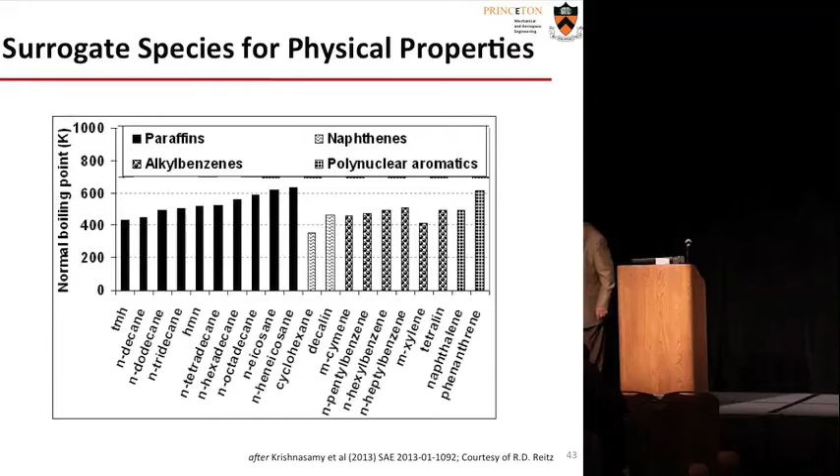So what would? Example: Rolf Reitz's work. He is putting together physical models for the fuel this way. He takes classes of species. You can see there's a very large library here to match the distillation properties. Do you want to build a detailed chemical model to represent this chemically? That's what's called physico-chemical surrogate development. The same species are going to represent both the physical properties and the chemical properties, and I've given up on it.

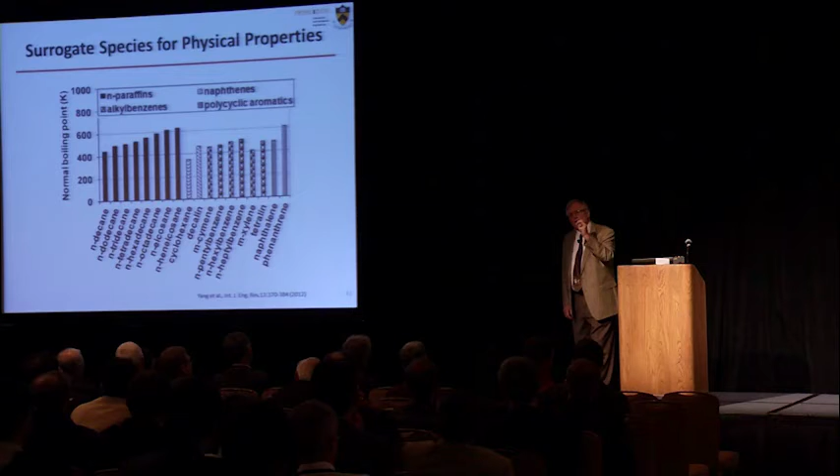That's what preparing this plenary did for me. We have to do it the way Rolf is doing it, and it says something about what we need to know in basic science in order to do it. So physical properties, I've got all the library here for every physical property I could think of. He uses that, but then he connects it to the kinetics this way. The left side is physical properties, the right side is chemical kinetics, and what he's done is he's tried to choose a specific species that represents a class of chemistry for the fuel components on the left.

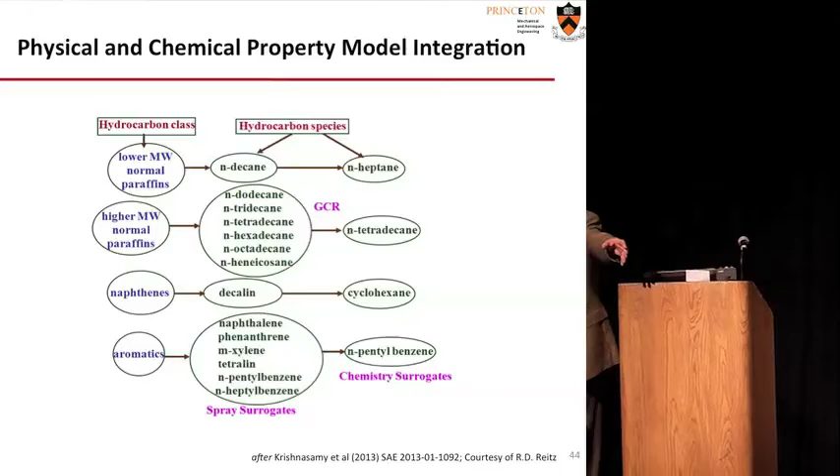Class detailed modeling - gosh, we've been doing that a long time. And it works, doesn't it? There's nuances, we need to know the nuances, but this is a workable way. It's completely flexible. I can add oxygenates on the left or the right as functional groups. I know how to put new alternative fuels into petroleum.

Rolf is actually doing full engine experiments with this, both for gasolines and diesel fuels, and he's converting what he knows in diesel fuels to gasoline species through the derived cetane number, octane number correlations. Oh my goodness, they correlate exactly. Now, if I hadn't shown you those engine schematics in the beginning, and I told you that they correlated exactly, you probably wouldn't be surprised. But look what went into those two different determinations: flame propagation for MON and RON, no flame propagation in DCNs, vaporization, mixing. And they correlate exactly.

And I showed you that the functional parameters correlate exactly with NMR. They're chemically representative of the real fuel. Those are the relationships we need to understand. I'm not here to tell you I understand them all. I'm here to give you the message that there's lots of work to be done in real fundamental basic science that is directed specifically to getting where we want to be in 2100, with a lot larger reduction in carbon emissions and new fuels. And this is the way it's probably going to occur.

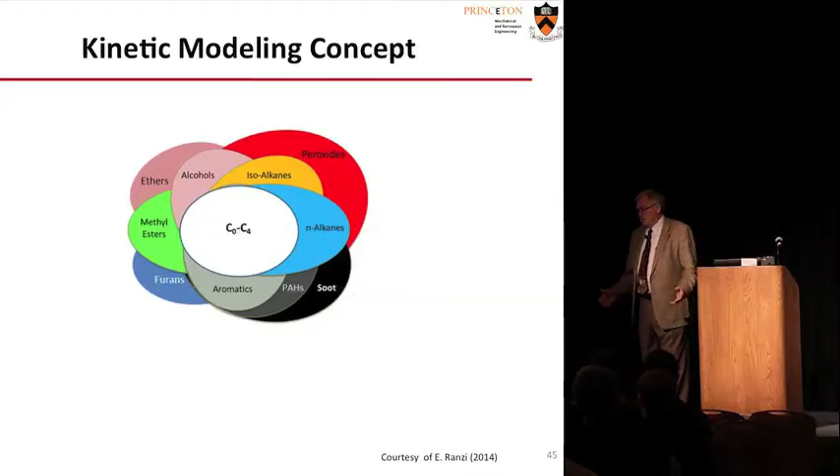We'll build a C0 to C4 model that's as accurate as we can make it, and we know it's going to continue to evolve. Why? We don't know all of the mechanistic parts, much less the parameters in it. Half of this meeting is about new mechanistic discoveries - important. So no model that's published today will remain the model tomorrow. I'm absolutely convinced of that after 45 years of working on hydrogen oxygen.

Okay, so let's think about a hydrocarbon. It's going to change, we need that change, we need to understand that. But we also need to reflect to the engineers what they can use, so we can build all of these other submodels around it.

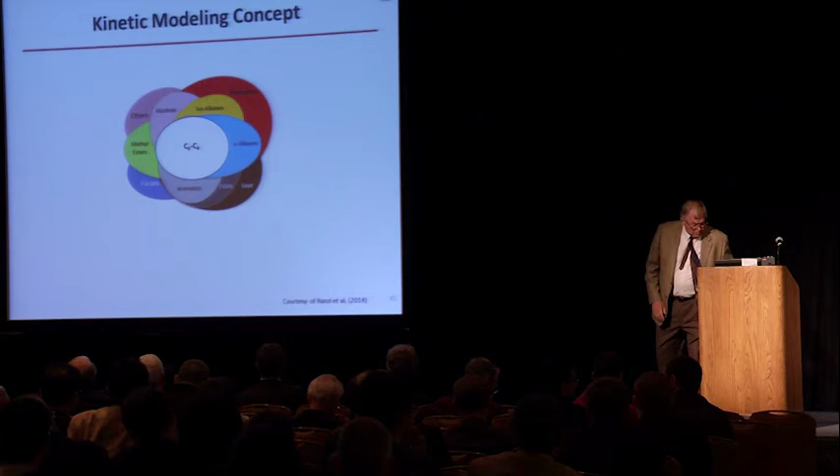This is what Eliseo Ranzi does. He was very nice to share this figure with me. I want to invite you to look at this paper that's quoted down at the bottom - it just appeared in IJCK. There are lumped kinetic models for almost every kind of real fuel you can think of.

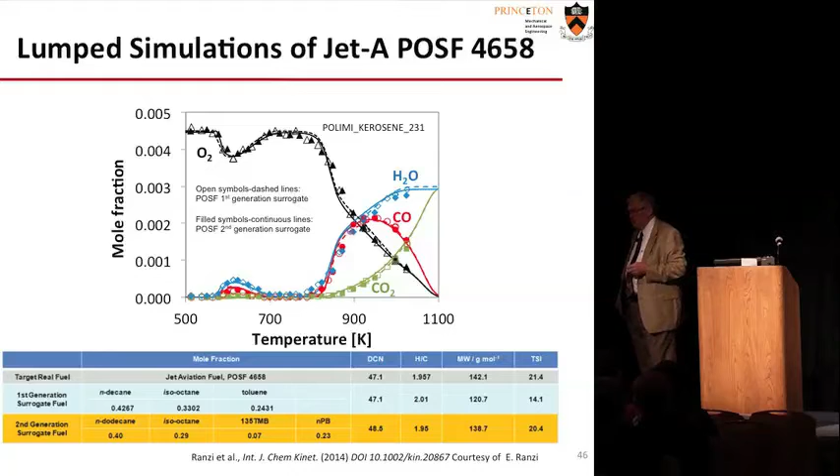And he was nice enough in that publication, after I sent him the reactivity profiles I showed you earlier for 4658 Jet A, to do the 2 surrogate fuel mixtures a priori for that result. You can see they agree exactly with the experimental data, and recall the experimental data did not fit the real fuel in the intermediate temperature region just above the hot ignition.

It was too slow. That is a result of cycloalkanes. It's the only place cycloalkanes have any effect on global combustion properties. We're trying to get that into the literature. I'm sorry it was rejected here, so I don't have any more privilege than you do. We're still working on it because a reviewer doesn't understand that I'm not interested in the detailed issues first.

I want to get to what the global issues are. This is going to be important to what? ITHR, intermediate temperature heat release, is affected by cycloalkanes. So if I want to know that in gasoline issues, I'm going to have to include them as one of the surrogates. Olefinic species act just like isomer structures.

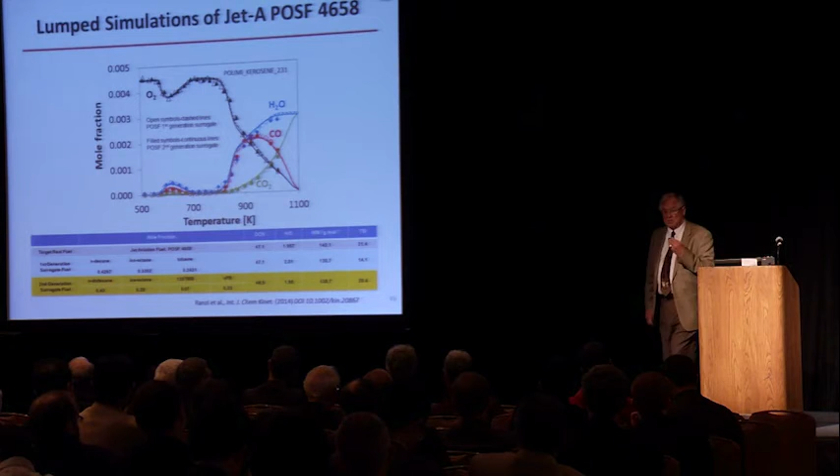Where's the coupling in a gas turbine between atomization and combustion zone? It's in heat feedback to the atomizer. That is going to change the atomization process, the droplet penetration, the droplet vaporization, and it's radiatively affected in gas turbines. That's why there's control through smoke point measurements of radiation in gas turbines. We don't care about the emissions from that—we care about the radiative feedback to the liner and to the atomizer so that fuels don't coke.

But could we use it as an emission issue? I believe we can. We've just published a paper on making up surrogate mixtures from fluids, not single components, but fluid cuts and real fuels. So we'll mix real fuels and fluid cuts from solvents, and we'll make those 4 property targets agree with another fuel, and they have exactly the same global combustion character. Why is that important? I can make up fuels that have very different physical properties that way, and all have exactly the same pre-vaporized combustion chemistry.

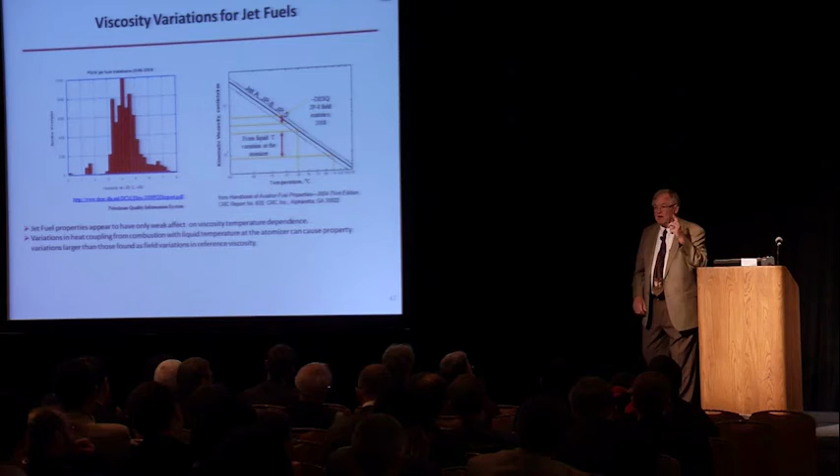I can do the experiments now in real turbulence, in real systems at pressure, and from the parameter space identify which is important. I think I'm close. I'm sorry, I'm that close.

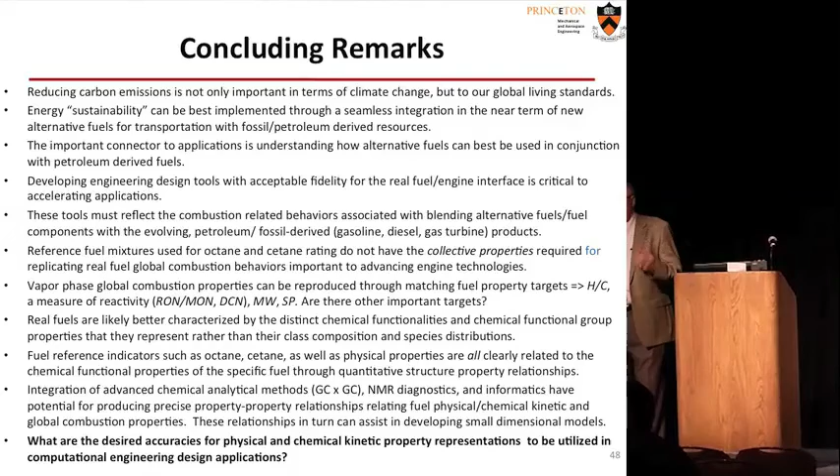I've told you a lot of things today. I hope the message was provoking—it was meant to be. I hope it's not the kind of provocation where we go away and say, I don't want to listen, I don't want to argue, I don't want to discuss. This was a provocation to discuss.

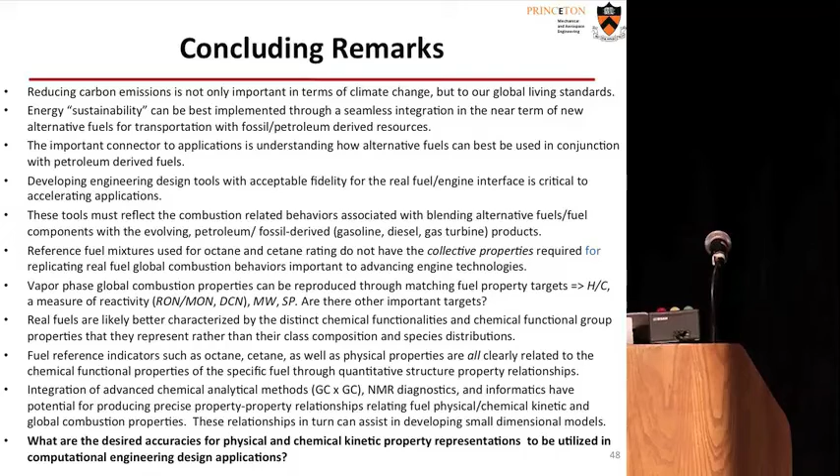Because our community is on the cusp of something that's very important. We are doing immensely important science. I would not want to ask how many industrial representatives are here, and it's because they don't see, and we don't see, the complete connection of what we're doing to what they need to know. This is where our community is going to live or die, in my opinion, over the next two decades.

We have to be relevant. We are relevant in science, there's no question. But we have to be relevant at the industrial level in solving this problem and producing this seamless integration of what we want to accomplish in reducing carbon emissions, eventually facing loss of fossil energies—and I mean eventual. I'm a very big believer that we've got to find the right technologies for carbon capture and sequestration. We don't have them yet, but they're all important to us maintaining living standards and other issues.

So I'm going to let you read my conclusions. Thank you again for your time—I really appreciate it.

I hope it was interesting. We thank Fred for a great lecture, and I'm presenting the certificate to him now. Please, after that, don't run off. Thank you so much. Here you go. Thank you so much for inviting me. I'm particularly happy it has my signature. Thank you again.